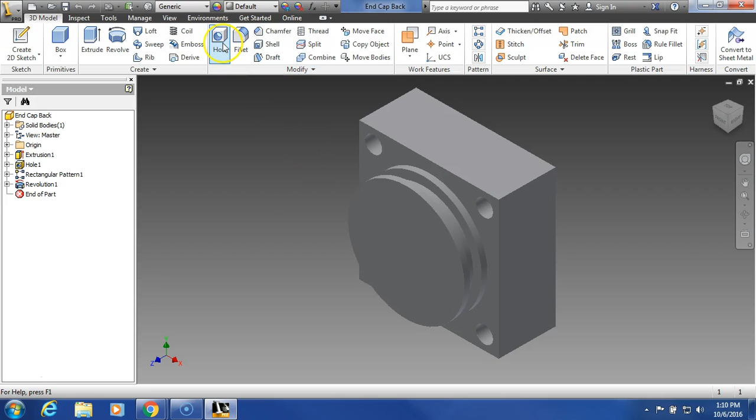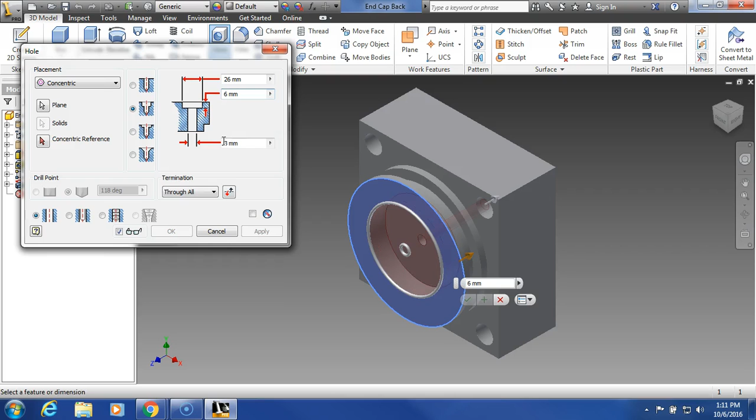Okay, so the next thing you're going to do is select a hole here on the modify panel, and we need to change the placement to concentric, and then we need to select the counterbore option. Then we go ahead and select on top of this front face. Then what we need to do is change these numbers. The first one here is 26. Next one here is 6. And this last one here is 10. Make sure that the termination is set to through all. And if you have the tapped hole selection already set, we need to change that back to the simple hole.

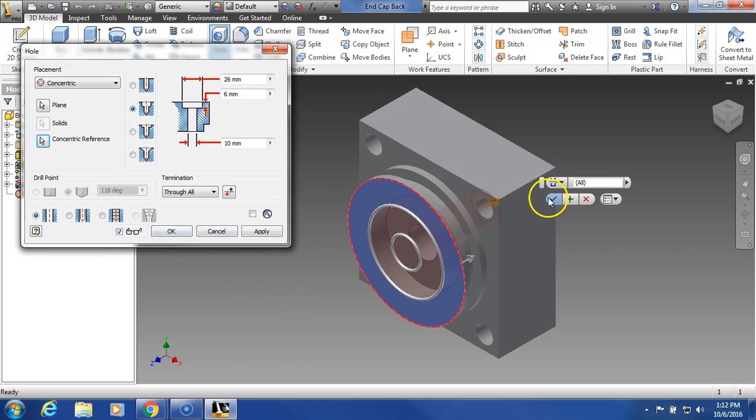Right now you'll notice I can't hit OK because we need to select the concentric reference. So I'm going to go ahead and select that. And I'm going to select this edge right here. You'll notice how it highlights in white. It centers the drawing. You'll notice the red outline here now. Now you'll notice I can also select the check mark. So we're going to go ahead and do that. That puts that counterbore in place there.

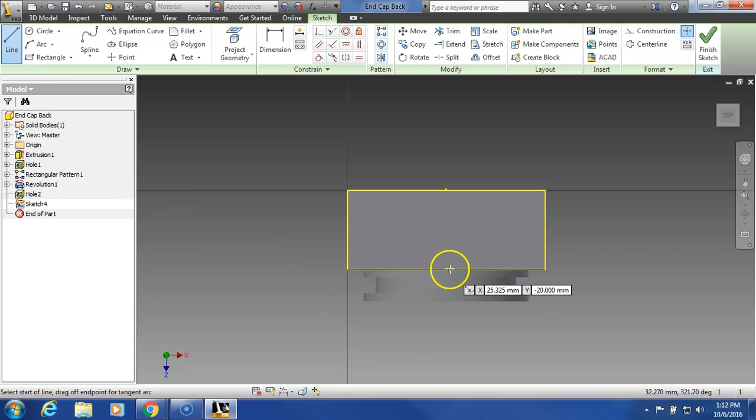And the next thing that we're going to do here is click on the top here, create a sketch, and we're going to get a line. And then we're going to click on that green dot that you see there, and we're going to go out 6 millimeters. It's very similar to what we just did on the last drawing, but this time when we make that hole, we're going to actually connect it here to this piece.

So what we're going to do here is get a hole, and we're going to set the placement here first. Make sure that the drilled hole option is placed. These won't read, guys, if you don't click on the window. So the drilled option there. We're also going to set the termination to, and then change back to the tapped hole option. Make sure metric profile, and we're going to change the size to 5. You'll notice again we can't select OK because we haven't told it where we want it to go.

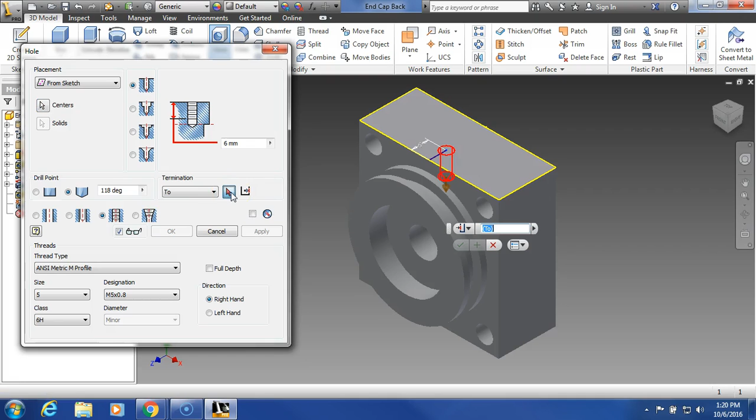And the last thing we need to do here is select this arrow here so we can select the surface that we want the hole to go to. And you'll see how this turns red here. It's asking, where do you want it to be selected to? We're going to select this inside hole here. And you'll notice how it clears out here now. You'll notice now we can go ahead and select OK. So I'm going to go ahead and do that.

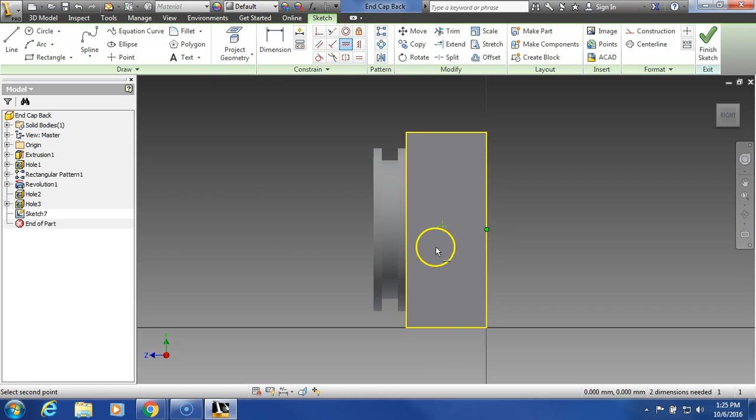Okay, so the next thing that you're going to do here is create a sketch on the side. And what we need to do is find the point up here on the draw panel, and put it somewhere here in the middle. We're going to constrain it anyway, so it does not matter where you put the point, just get it somewhere close. Then you're going to do the horizontal constraint. Select that, and we're going to come along this edge here, find the green dot, click the point.

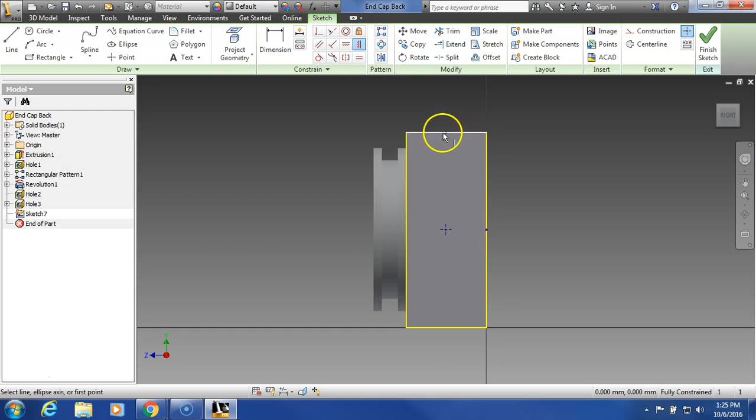Then we need to do the vertical constraint. So that one's next to it. And we come along the top here, we find the green dot, and then we're going to come back and select the point. And you'll notice how that now does constrain it and centers it right here in the middle. Once you've done that, go ahead and hit finish sketch.

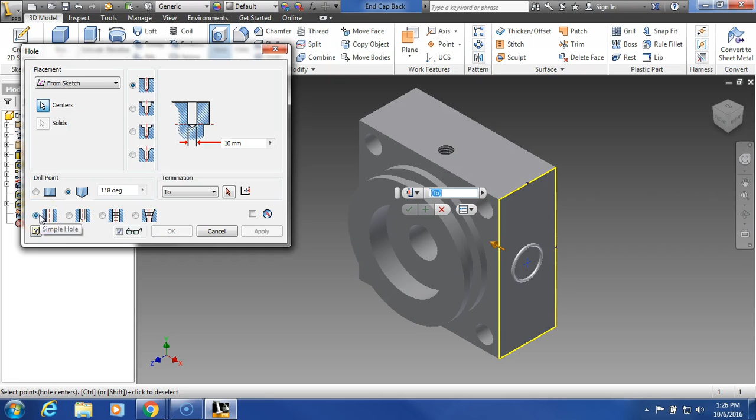Now that we have the center point here in place, we can go ahead and start a new hole. And you'll see it already picks up where the center point is because it has the arrow here. We need to change a couple things on the hole diagram here. So we're going to change it back to a simple hole, and instead of going to something, we're going to go to a distance, and we want the diameter to be 10, and we also want the depth to be 10. Once we do that, we can select OK.

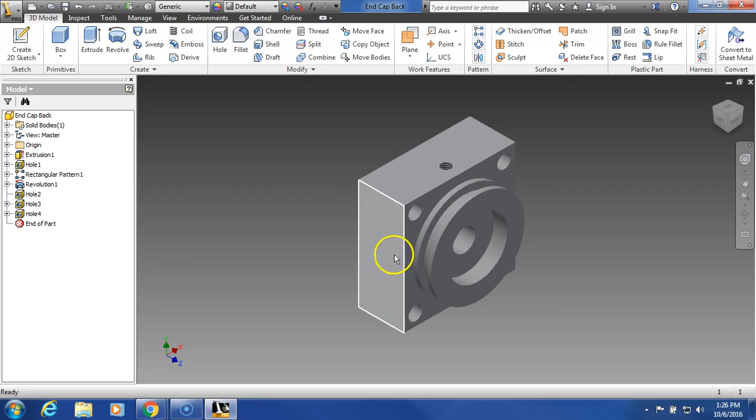Then the next thing we want to do is mirror this hole over to the other side, which is over here. So we want to take that same hole and put it here. Instead of going through that whole process, we can mirror it in about half the time and get the same objective. On the pattern panel right here, you can select the mirror option. The features arrow is selected, so we're going to select the feature, which is the hole. That highlights blue. Then what we need to select next is the mirror plane, so it mirrors over to the other side.

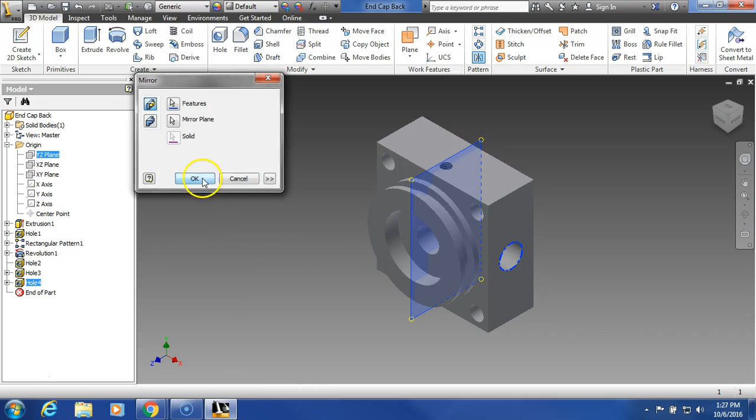And the way we find that is we come over here to your browser tree. We expand the origin folder and we find the YZ plane. That is going to be our mirror plane, because it splits it right down the middle. So we go ahead and select that. Notice how that highlights blue. Then when we select OK, you'll notice that the hole is now on the other side. So we've duplicated the hole and mirrored it. So at this point, your drawing is now complete.

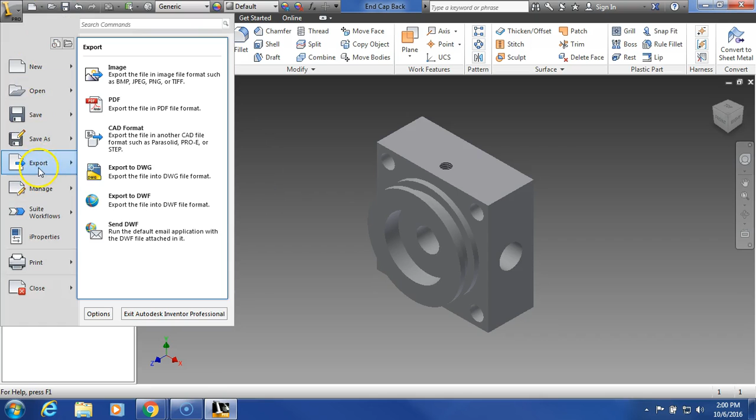Go ahead and save it. We have this already saved, so we can go ahead and hit save here. It's already in your Z drive, but what you need to make sure you do is export it to a PDF. Just put that out on the desktop is fine. End cap back, hit save. And here it is right here. And then you'll turn that in. And remember, when this pops up, just close that out. And you're ready to turn in.